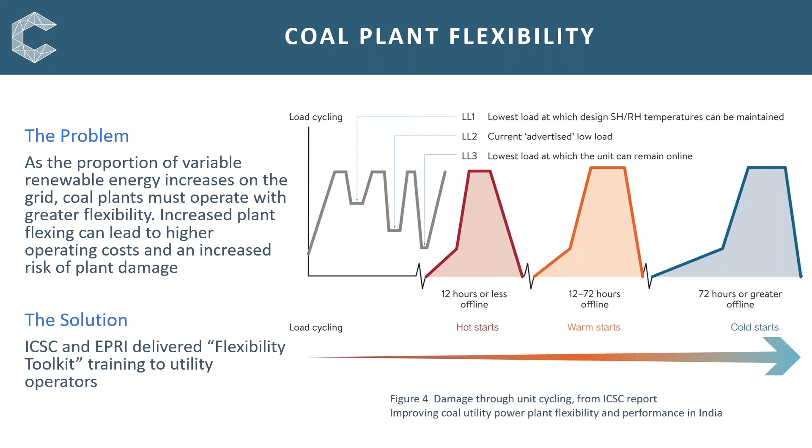However, even the best toolkit, and EPRI's does have the best toolkit, cannot stop plant damage from multiple flexing. It can only act as an early warning system for the potential threats that are going to arise. So the reality is Indian coal plants must flex.

In the rest of the world, they might need to flex depending on the grid. In India, it's a government requirement, and this is unique to India. Further, the amount of flexing Indian plants have to achieve is actually specified. At the moment, they must achieve down to 55% load, and they're expected to push that down to 50, possibly by the end of this year.

When it comes to the emissions, which is what we're worried about, emissions will increase if efficiency comes down. In the case of flexing with cold starts and so on, it can be 10 or even 12% increase in emissions due to that efficiency drop.

Over and above that, at the same time, many of these Indian plants are trying to install low NOx burners to bring down the emissions of NOx. The way low NOx burners work is with this stoichiometry, the balance of the coal feed in, the temperature, the oxygen, and so on.

During periods of flexing and startup and shutdown, low NOx burners do not work as they should. That's going to affect the emissions.

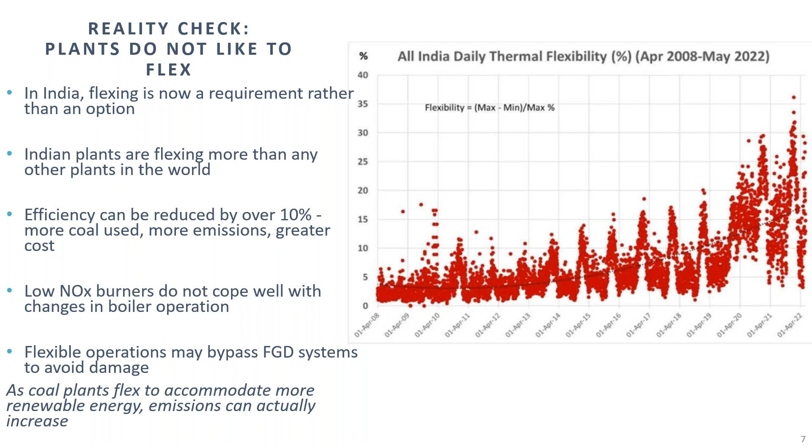So ironically, as we ask coal plants to flex more to improve the amount of non-fossil, cleaner energy onto the grid, these plants themselves are becoming significantly more polluting as they do so. And that's obviously less than ideal.

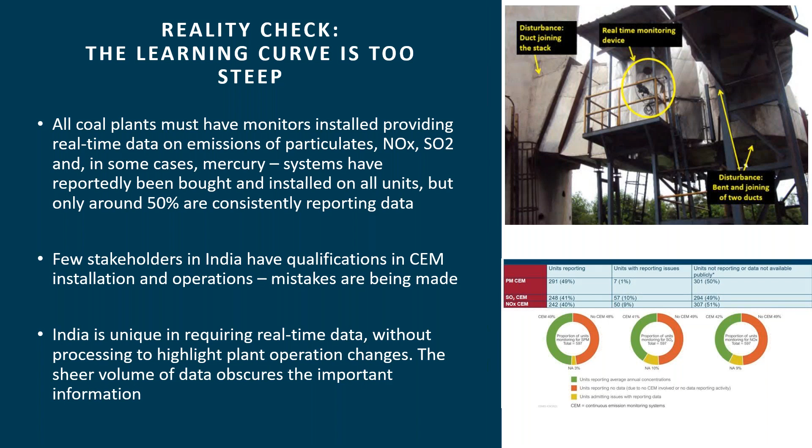So the wish list is going to be in terms of either going to the European or the US method of processing data before it's sent in. Otherwise, the regulators are going to have to set up some specialist department to work through this data, and that will be a costly challenge.

So in terms of output from this sector, we have the CEM report on the top there, summarizing the challenge that I've just discussed. But also at the bottom there, Sanjeev Kanchan, our wonderful consultant in India, took the current best practice guidance in India, which was produced by the Electricity Association there. It's a very short document - it basically says use the methods given to you by Europe or the USA. What Sanjeev has done is combine everything, including the expertise from America and Europe, into one single document so that people have one document they can go back to.

Now it's being distributed in hard copies and soft copies around India as much as we can. It's already been adopted by the cement sector as best practice, and we're hoping the utilities will do so too. We're not precious about it - if people want to change it and modify it to suit their own source category, we are more than happy for that to happen.

We just want people to work together on best practice. To this end, we've created this legacy initiative called CEMEG-India, the Continuous Emission Monitors Expert Group. It's hosted by the Council for Energy, Environment and Water, and it's still in its infancy, having only had 2 meetings so far. However, they plan to build up membership by collating information on who's doing stack testing and monitoring in India.

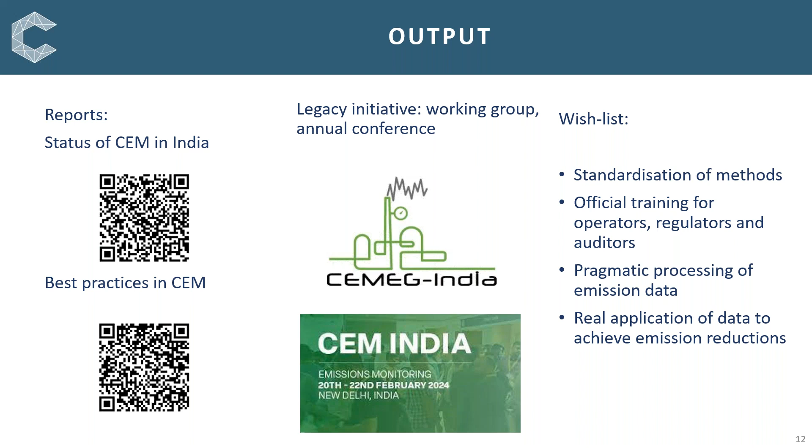Emission control, as I said earlier, the emission norms have come in. They were introduced in 2015 out of the blue, and they hit hard. These are challenging emission limits equivalent to those in the Western world. India expected their utilities to be able to comply within 3 or 4 years, and of course that's not happened.

It's a big country with a lot of challenges. They were expecting plants in India to achieve what the Western world took four decades to achieve. Further, Indian coals are 40 to 50% ash, an order of magnitude more ash than most internationally traded coals. So the technologies that work in the Western world won't necessarily be boltable onto an Indian plant and work immediately.

So India is going to have to work through the commercial technologies available and work out by trial and error what is going to work in the Indian fleet. This is going to be costly and time consuming, especially for those plants that step up and do it first, because they're going to have to spend a lot of money investigating why things didn't work and how to fix them. Hopefully they will share that information to accelerate the rest of the fleet.

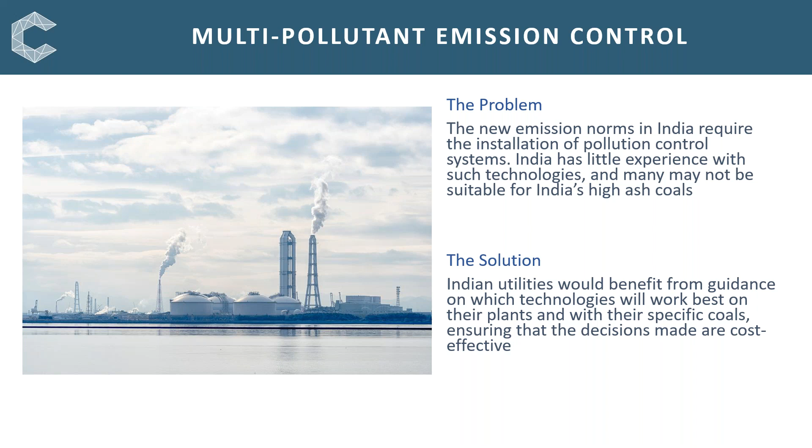We can summarize this challenge. This is what's happening in terms of sulfur emissions installation across the fleet, so control strategies, basically FGD for sulfur. We see around 6% of the fleet are already in compliance. That could be FGDs, or in some cases low sulfur fuel. The rest are either in a phase of tender awarded, floated, or feasibility.

Now that looks quite good, but that chart has been fairly consistent for several years now, in that the plans are there, but the actual movement into practice is proving to be a challenge for several reasons. Firstly, this legislation came out in 2015 and derogations are continuing, so plant managers are hesitant and say, well, why should I move now? Derogations may continue and I can save myself some money for a little bit longer.

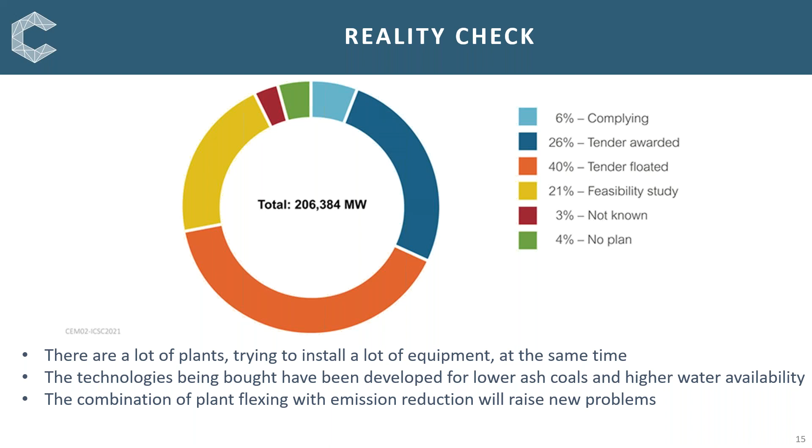There's also the challenge that if these, I don't know, 700, 800 units in India are all trying to put in control technologies at the same time, then there's going to be a shortage of expertise, of equipment, of base metals, whatever they need to build that kit. And of course there's the financial challenge. In a time when many countries are talking about phasing down or phasing out coal, many of these plants are going to be asking themselves, am I going to get payback on my investment in the time period my plant has left to run? And of course, at the same time, they're being asked to do biomass co-firing, they're being asked to flex.

So the report is there and it summarizes these challenges. We've not created a legacy initiative on this, it's not our position to do so. It's too much of a challenge, it's too intrinsic to the utility sector. It needs to be addressed at the government and utility level, by talking to each other around a table, as it's a big problem.

We did have one suggestion. Rather than expecting this sort of blanket compliance with FGD and DeNOx across the fleet, we did a basic ranking of the plants. You can't see it well here, but if you download the report, you can go into it in detail. And it's not saying that these are the dirtiest plants by any means. What it's saying is these are possibly relatively young plants, relatively high capacity plants, the plants that we know will be relied on for decades more to come.

So if you want to achieve results quickly, if you focus on maybe the top 15 of these plants first, then you'll get a really good reduction in emissions that you know will last for decades across the grid, without wasting too much money on smaller, older plants. So a tactical approach is what we're trying to talk about there.

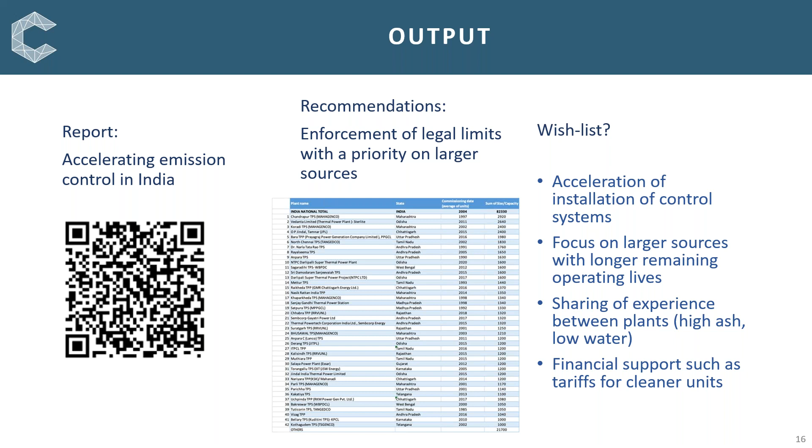The final area of concern in India was ash management. India has a legal requirement for 100% utilisation of its ash across all coal plants. This fresh ash must be delivered free, at the plant's cost, to any end user within 300 kilometres of the plant. That's a lot of trucks travelling a lot of distances at the plant's expense, and if they don't do that, they are fined for it.

Bearing in mind that it is now recently being expanded to legacy fly ash, so they must also use up these older, in many cases wet, underwater, damp dams and ponds and piles of ash that are sitting around.

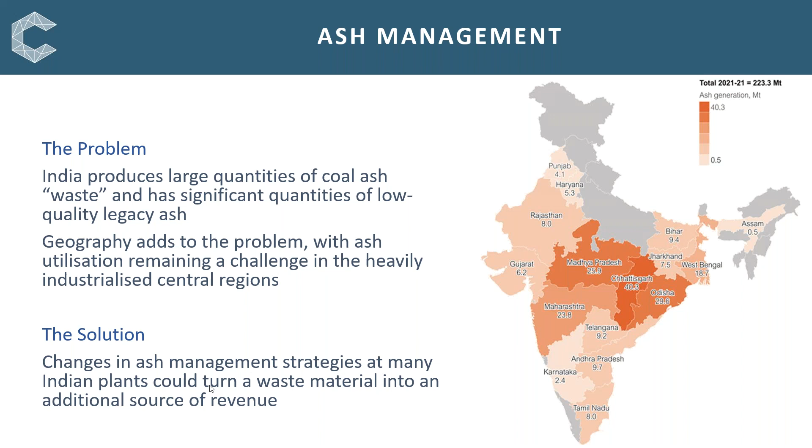As I've mentioned several times already, Indian coals are between 40 and 50% ash, so they're essentially trying to burn rocks and stones. A lot of ash comes out the other end, 230 megatons per year. At the moment they're achieving around 60% utilisation of this fly ash, and unless something changes in terms of new markets and infrastructure, it's going to take them 18 years to get rid of all that legacy ash. Plants are now facing financial penalties for not using this ash.

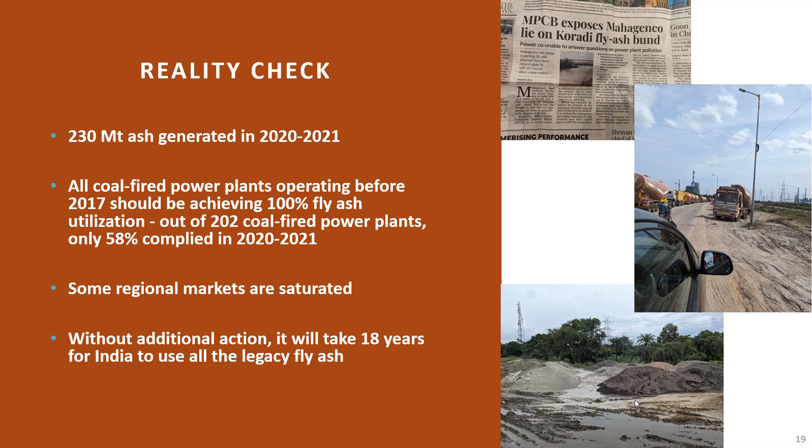Now, again, there's the full report. I've only brushed on what's in there. We do look at more regional information, plant by plant information of who's producing ash, who's managing to get rid of it, who's not. We get good examples of companies building dedicated train lines and dedicated hubs for moving fly ash further afield, and also plants putting in, I think it's an NTPC plant for example, that's putting in an aggregate construction material on site.

So they're creating their own aggregates, their own tiles and bricks. These are materials they can sell direct from the plant rather than give to an end user to sell, recovering revenue and investment and so on.

Also high-end products, especially for those big piles of legacy coal ash just sitting there. This is something South Africa is also looking at: the recovery of cenospheres, the little bubbles of fly ash that are really good as filler material, or rare earth elements, a big buzzword at the moment. Governments are very excited to get as many of those as they can within their national availability.

Having your own supply of rare earth elements makes you solid and dependable as a country, and India is very keen to find its rare earth elements.

However, there is no means by which any coal-fired power plant is going to invest money in paying for research for a legacy coal ash pile to find out if it happens to have rare earth elements that industry in India might want in the future. This is something that has to come down from the top level. If the Indian government wants rare earth element security within the country, they need to set up a coordinated stakeholder working group to look at what end uses they have for these, how to source them, and if necessary, go back to the coal piles and provide funding for them to be evaluated in terms of rare earth recovery. It's all in the report.

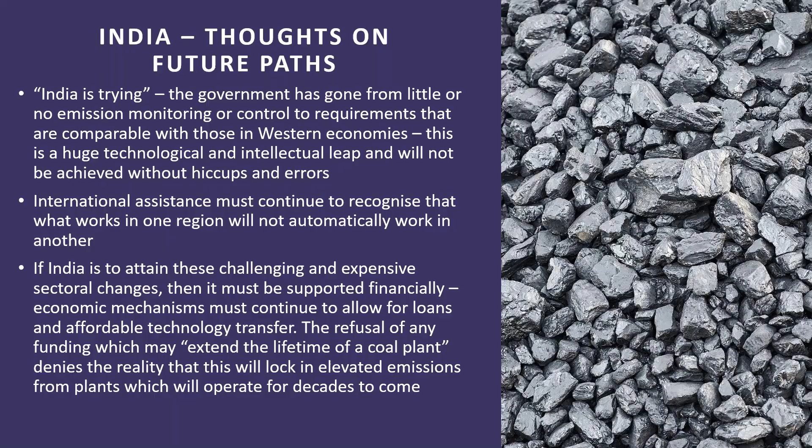As I said before, this is very different from the India study, in that we were working towards creating a compliance strategy under the Minamata Convention on Mercury, which requires the fleet to control and, where feasible, reduce their emissions. This involves evaluating emissions from the fleet, ranking the plants, finding a cost-effective emission reduction strategy, proposing projects, and talking about funding. That report will be out by the end of this month, we hope, and another report will also be out, but not with the results we were hoping to get.

So you've seen this before if you tuned in for our reports and webinars. Just a quick reminder: we calculated mercury emissions unit by unit across 111 units in the Indonesian coal fleet. Based on this, we worked out that there were 15 plants out of those 111 which, over the whole lifetime of the fleet, will emit almost 50% of the total emissions.

Assuming these plants all continue to run as predicted, by spending money on these top 15 rather than over 100 plants, you could reduce emissions significantly, very quickly and cost effectively. What works there can then be cut and pasted over time across the remaining fleet. All that information you can get from the QR code download report.

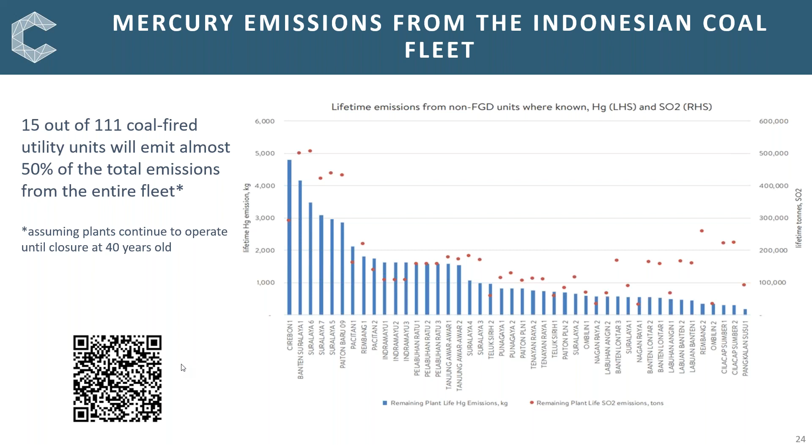Now, the original plan was, and still is to some extent, to choose 3 plants representative of the Indonesian fleet, so what worked at those plants could be cut and pasted across. We chose Paiton because it was interesting, as it has a seawater FGD system. We'll talk about that in a minute.

We chose Suralaya because it's one of the biggest plants, currently 8 units, I think going up to 10. It's a nice plant that represents a lot of the fleet.

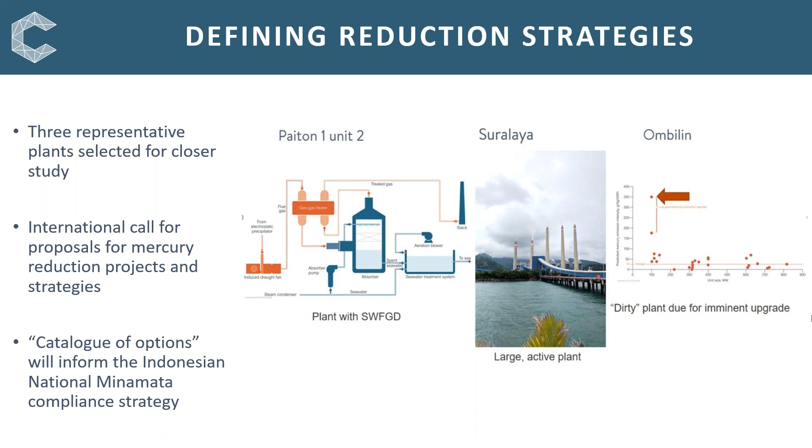And we chose Ombilin because it was the one plant named in the report as being the dirtiest, genuinely the dirtiest, a mine plant emitting orders of magnitude more mercury than the rest of the fleet per gigawatt hour, simply because it was inefficient, and therefore theoretically a quick, cheap fix. Obviously, best laid plans don't always work out as you plan them. Some ways good, some ways bad.

Since we named Ombilin as a plant that needed to be upgraded, it has been upgraded, which is great. A company has gone in, upgraded it significantly, and it's now running as it should be. We include that as a case study in the report that will be out at the end of the month. But at the same time, we also include details of other upgrade systems and approaches that could be used, because we were not allowed to obviously support one individual commercial supplier.

Moving on to Suralaya, the plant we had identified, the unit we wanted to work on has been named under the Just Energy Transition as a plant that might be phased out early. So we're going along with a kind of generic Suralaya type plant to look at strategies. And Paiton, the seawater FGD, could be a liquid emission issue, and I'm just about to talk about that. Over and above that, we have to consider phase down plans and the new requirement for biomass or even ammonia co-firing in Indonesia. So the whole strategy for reducing emissions has to have a broader view than we originally thought. And the catalogue report does include all of that, and it will, as I say, be out at the end of the month.

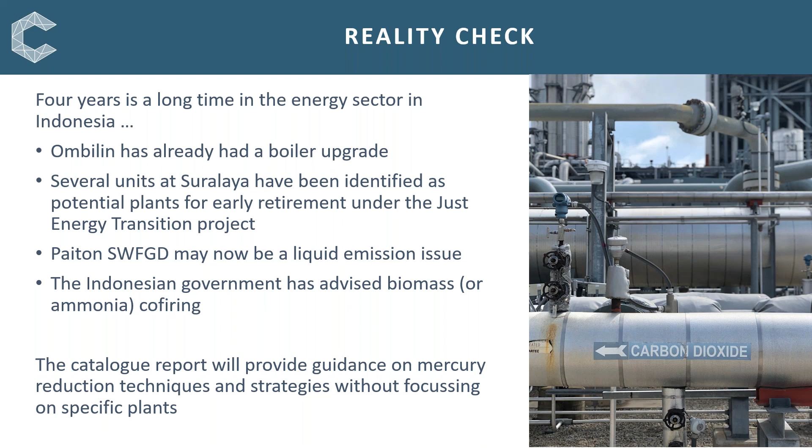I'm going to quickly mention Paiton, as this is where I ask for help. We know the Paiton seawater FGD unit is capturing some mercury. Indonesian coals produce a lot of elemental mercury, so a lot of the mercury will be going straight out of the stack here, even in an FGD system. The obvious solution would be to oxidize it, and that would increase the mercury coming down in the solution, which is great. However, from what we know of a seawater FGD, the mercury is not, as it would in a wet FGD system, going to end up in the gypsum where it's in a nice controlled situation where it's not going to be an environmental concern.

In these systems, it's either being re-released during the aeration stage, which is not good, because that's at ground level mercury being released into the environment, or potentially even worse, it's being concentrated and then released into the local seawater, into the local water body, and that's where the fish is, and that's exactly where we don't want the mercury to be. It's not a unique challenge to Indonesia.

We know there are seawater FGD plants in India, Thailand, Vietnam, potentially the Philippines, I think. A lot of Southeast Asian countries with a lot of seawater, a lot of coastline. It's cheaper to put in a seawater FGD system. Seawater FGD is great for sulfur. That's what they're putting them in for. Our concern is they're actually creating a potential new mercury issue.

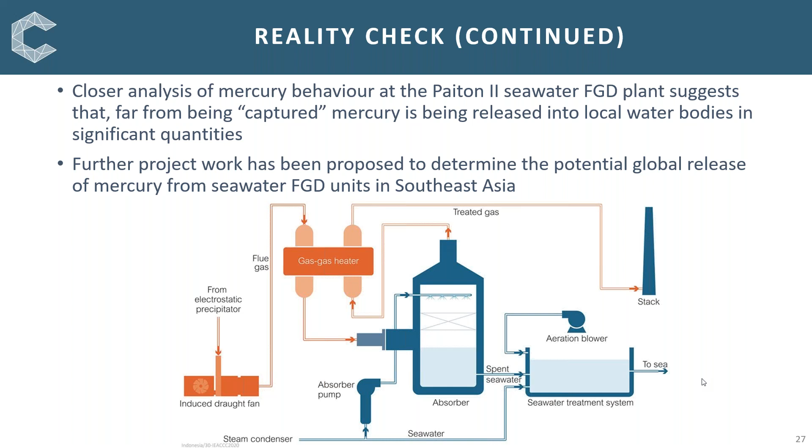We are proposing a new study on this that would be run through the Global Environment Facility. If you're interested in being involved in the early discussion, I would be delighted to hear from you, so please do message and reach out.

So finally, back to, I think, the biggest lesson I learned about this whole project is there's not enough money for all of the wish list of this project to happen, and that's what's holding things up. Banks and financial institutions will no longer fund anything, the wording is, that will extend the life of a coal plant. It's only available for either closing that plant or repurposing it. So, and on paper that sounds good. You're closing the coal plants, therefore renewable will take over.

But as we know, that's not how it's going to work, because until renewables are dispatchable, people are going to continue to burn coal and gas. And in this case, these countries, it's only coal. They do have perhaps a phase out or phase down plan, but that's not for decades. And many of these plants in Asia we know are only 10, 20 years old. So they're not planning to cut down in the near future either. They're going to continue to operate until they get the money back on their investment for build and so on, and until they're not needed anymore, neither of which is happening soon.

Many of them are in long-term contracts. They don't want to have a stranded asset issue. So they're going to continue to pollute at their current rate and may even increase their emissions, as we know from India, as they suddenly have to flex more than they did in the past. And so when you're asking plants to spend a lot of money on upgrading, then they're going to argue back, am I going to get this back? Is it worth it? Are you going to close my plant? Are you going to use my plant? I'm already spending a lot of money on keeping the lights on.

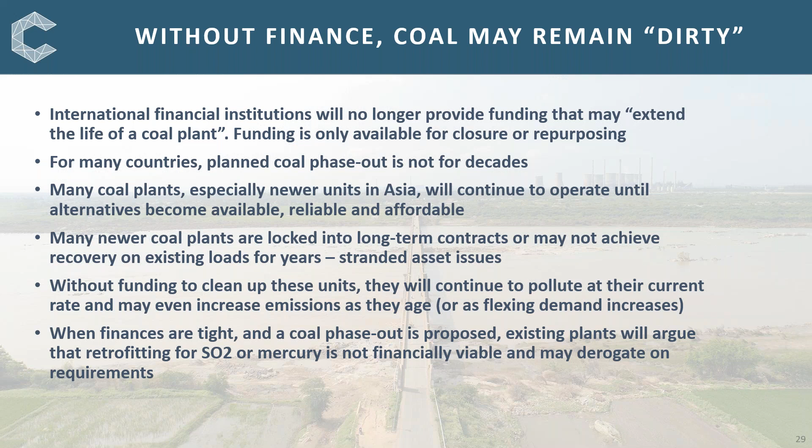So there will be a dispatchable replacement. However, that's not going to be ready for another 20 years. And in the meantime, I bet you Cirebon's going to argue that it doesn't need to put any control technologies in because it's on a closure path. You've then got two decades worth of mercury and other emissions happening until that plant goes down. So you've effectively locked in the highest emissions for another 20 years. So I would argue that in addition to closing, Cirebon still needs to talk about investment in retrofits for controls.

So to conclude, we know that there are a lot of challenges for Indonesia. It's an almost perfect storm in terms of emission reduction, biomass co-firing, flexing and so on. And it wasn't until I was out there face to face with these people that I really understood that they are trying to do their best. They do have the expertise, but we're asking too much of them too fast. They're being asked to achieve in one decade what it has taken the Western world three or more decades to achieve. And they're being asked to do so with less water, with more challenging coals, and with no financial support. It's not an easy ask. If they invest in cleaning up their fleet, they may not be able to run that fleet long enough to get their investment back. Some are going to argue that's an excuse for derogation, and nobody wins in that situation.

We all know that Asia is responsible for the greatest emissions because that's where the most coal is being burnt. But we must also accept that it's the region that's currently least capable of fixing this issue without international financial support. And as I say, that is addressed in a new short report that's coming out soon.